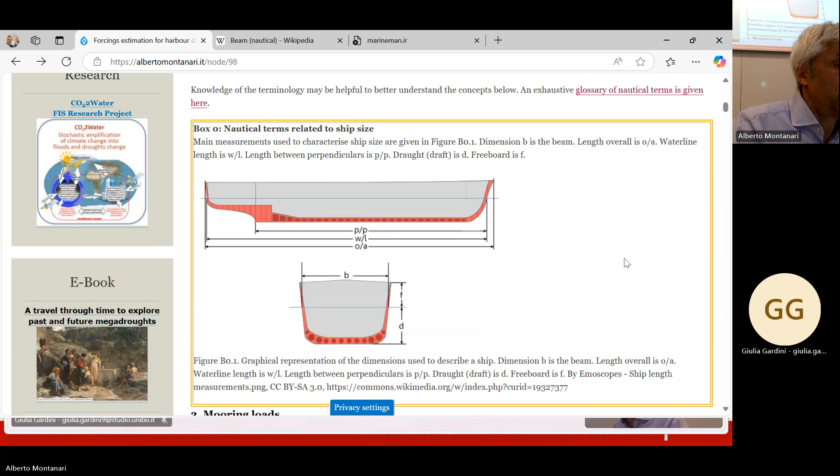Now let's go back to our figure here, I can take it from the PowerPoint presentations. Here there are some terms I would like you to try to remember, because we will use them several times. So the beam is one, and also the length overall of the vessel, marked OA, which means the max length of the vessel.

This is extremely important because, depending on the max length of the vessel you are expecting, you also have to size the berth, as we said, by sizing a longer berth than the max size of the vessel you are expecting. The waterline length is what is called here WL, W for waterline and L for length.

And then there is what is called the length between perpendiculars, which is PP. We will not use it, and it is defined in the way you see sketched here. It is rarely used. Usually, we use the length overall and the waterline length to characterize the longitudinal dimension of the ship. Longitudinal means along the ship, and transversal direction is across the ship.

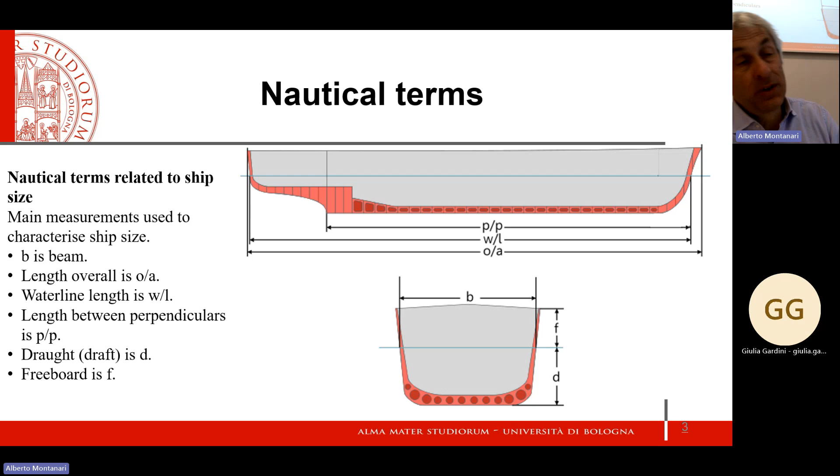And of course, they know, based on engineering design, when it is the time to load some ballast. Okay, this is just a start.

So let's start by talking about the mooring loads, which are loads that come from the sea. You may remember that we discussed last time a sketch, the loads coming from the sea, coming from the land. Mooring loads come from the sea, and they are originated by the mooring lines, which connect the ship to the mooring points.

The mooring loads can be originated by wind hitting against the ship, and this is a relevant force. It's definitely the most relevant, even more relevant than the mooring load originated by waves. When I talk about mooring loads originated by waves, I don't mean the direct action of waves against the berth. I mean the action of waves against the ship that is transferred to the berth through the mooring lines.

And then there are the currents. Same thing: the currents tend to move the ship, and therefore an additional forcing is transmitted to the berth. When we want to estimate these loads, of course, we need to start from a sea variable.

Defining the expected wave height with a given return period. This is a problem that you know how to solve, because with Professor Archetti you already studied how to estimate an expected wave height, wave frequency, wave period for a given return period. So you are already familiar, correct, with the terminology return period and extreme estimation.

Let's start from the ship. For a design ship, an expected ship, up to a tonnage of 20,000 tons, each mooring point can be designed to resist the following minimum loads: horizontal pull ranging from 10 to 100 tons, depending on the ship displacement and type of load. There's a factor of 10 between the minimum and the max of this range. To give you an idea, if you make a simple ratio between 100 and 20,000, you get an idea of the ratio that converts the tonnage of the ship to a horizontal mooring load.

The vertical pull is about 0.5, half of the horizontal pull, and we assume that they may act at the same time, because when you have wind you also have waves, and the waves cause the ship to move up and down while the wind is a horizontal load. Therefore we cannot assume they are not occurring at the same time; they are very likely to occur simultaneously.

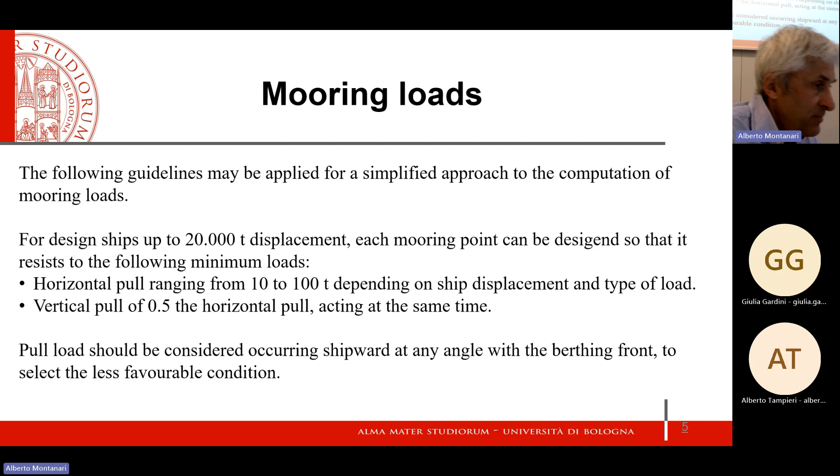Now, for a design ship of more than 20,000 tons displacement, the assessment of mooring loads should be carried out by considering all possible forcings operating at the same time. This means the possible forcings given by wind, currents, and waves. If you have a ship with a very large tonnage, we have to assume these loads can be concurrent, because even if they have different time scales—the current varying differently than the wind and the waves—the time scale of the wind is in a way related to the time scale of the waves, but for the current the time scale is different.

But even if the time scale is different, very large with the ships, we assume that they may occur at the same time. Here you see a reference where I found these recommendations, these orders of magnitude. I think the orders of magnitude are extremely important.

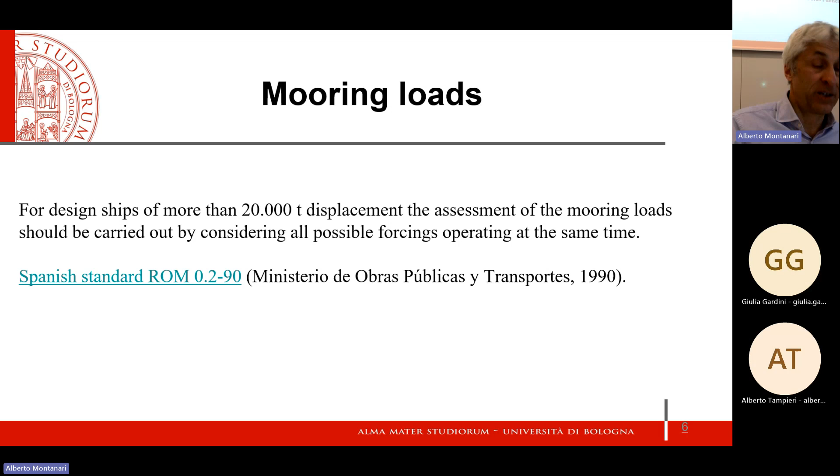But it's important that you know the numbers of harbour engineering, of course - all forces. So we have to characterize wind, we have to start from wind. And how to characterize the wind? Of course, through measurements, and we will see there are precise rules, standards for measuring wind velocity.

Wind velocity is not constant usually. You don't get a constant wind, you get a wind velocity that is varying. There are gusts - the gusts are the strongest episodes of wind velocity. And then, even within a windstorm, you may have some seconds, even some minutes, where you don't have any wind or the wind velocity is very low. As I said, we need to characterize it statistically.

So we start from the data, we start from the observations that are collected by following precise rules. First of all, the instrument to measure wind is the anemometer, and the anemometer is placed at an assigned height over the ground, which usually by standard is 10 meters. And it should be specified - so when you collect wind data, in the metadata, which means additional information regarding the data, you should find the height of the anemometer.

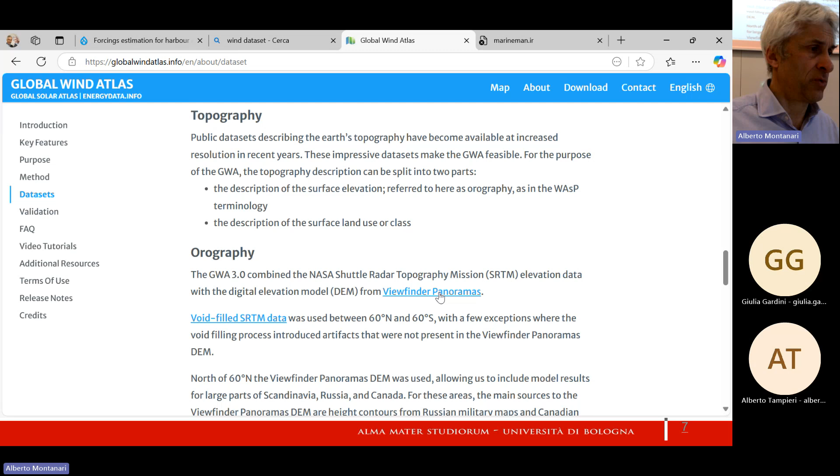Some of them can be used. Also here, there should be a map somewhere. Bathymetry - you see that there is also some data on bathymetry. Anyway, viewfinder panoramas - this is a global data set of digital elevation model which describes the shape of the land.

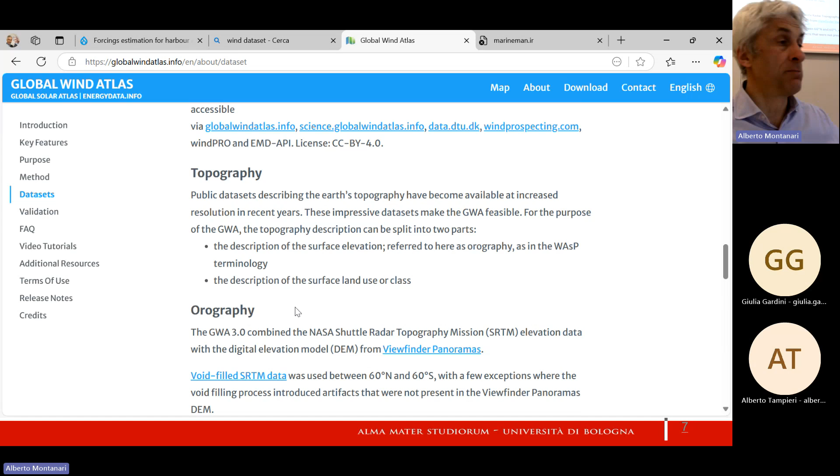And I think it is here, global atlas of siting parameters. Anyway, just wanted you to know that there are several sites where you can find this data, and there are also several videos on how to use it.

And the list of open data wind turbine data set - this is in GitHub, so it's fully open. This is the new European Wind Atlas.

Let's see if this is more accessible, more immediately accessible. Here there is a map - welcome, okay, I am an educator, good. So here you see a map which is clickable, and then you can see what are the variables that are available, horizontal wind, and here you see a terminology.

This gives me the opportunity to clarify the difference between climate and weather. Weather is the day-to-day or hour-to-hour data. Climate is averaged over a time window assumed to be at least 30 years usually. So climate wind velocity over 30 years is useful for designing, for instance, wind turbines - it's not very useful for designing wind forcing against ships.

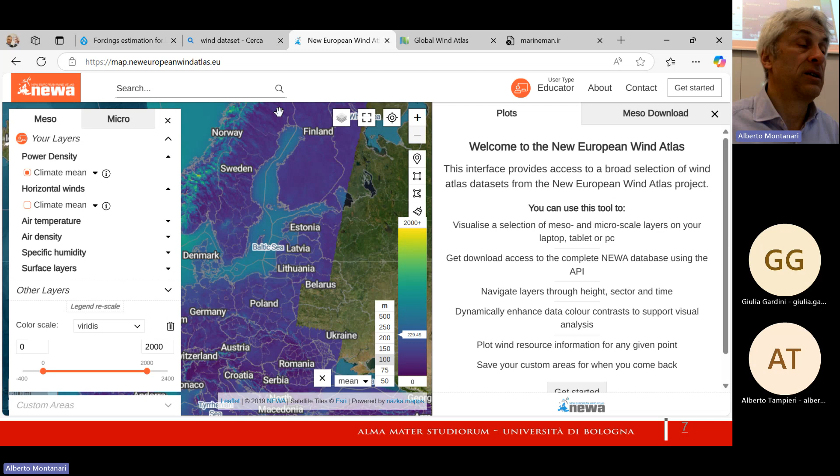When you download this data, try to understand by looking at the metadata how the data were collected. When you use data, you have to get a good knowledge of what you are dealing with - what was the instrument, the height of the instrument, the anemometer, what is the expected uncertainty, what is the time scale of measurement - hourly, minute, or seconds. You really have to get a good knowledge of the starting point of the data and know everything that is possible with it, because it conditions the uncertainty of your final result.

So once you have the data, you have to elaborate it statistically. You have to describe the probability of getting, at the site of interest, a given wind velocity and a given wind direction, because it's not only a matter of velocity - it is also a matter of consideration, the direction of the wind.

Keep in mind that we try to align the berth with the dominant current direction, and if it exists, a dominant wind direction. The wind is less dangerous if it hits the ship in the longitudinal direction, because the transverse area of the ship is much lower than the longitudinal area. If the wind hits perpendicular to the longitudinal direction, it hits a very large area of the ship, and therefore the pull against the berth is much larger. So the wind direction is extremely important.

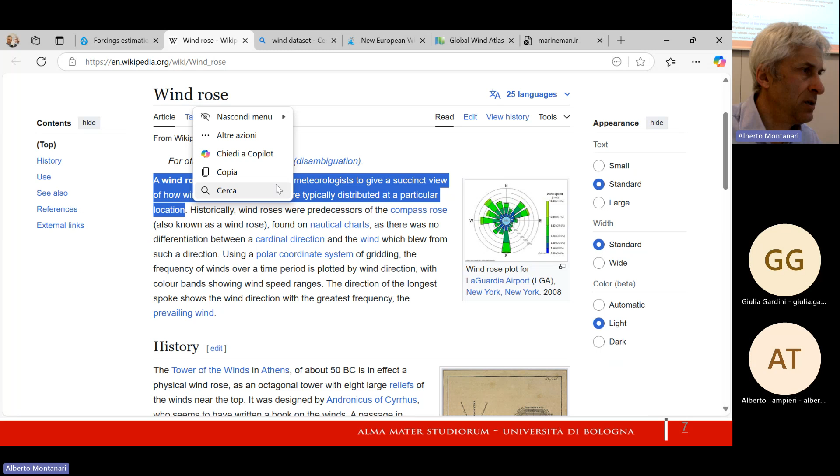So what is a wind rose? Let's open it - wind rose here cannot be opened, so let me go to my website. Here, the wind rose - first of all there are figures here, but let's look at the wind rose. A wind rose is a diagram used by meteorologists to give a succinct view of how wind speed and direction are typically distributed at a particular location. Here there is a figure that I copied onto my website.

Let's get it in PowerPoint because it's the same figure. Here it is - it is a wind rose at LaGuardia Airport. Of course, wind is also extremely important in airports for obvious reasons. What is a wind rose? It is a statistical representation in terms of probability of wind speed and wind direction.

Here you see, first of all, the circle at the center, 3.6%. It is the percentage of time of calm weather, no wind. So it means that over a long period of observations, you get 3.6% of these observations with zero wind. Perfect, this is fine. Now let's look at the south direction - you see that there is a long bar that is shifting in different colors.

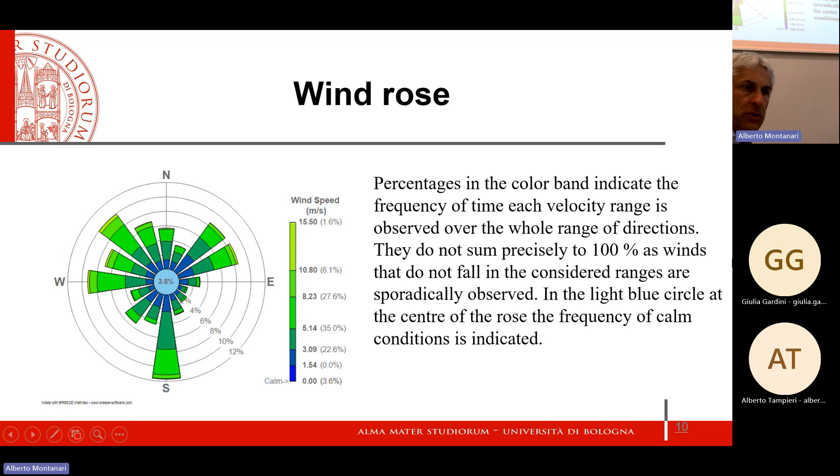But in any case, let's start from this windrose—the windrose gives us the wind velocity. Okay, we already commented about this figure, and also about this.

This is interesting—let's suppose I want to concentrate on the southern direction, and then you can get these percentages. So the wind velocity of 3 meters per second, for instance, is not exceeded about 2 plus 3.6% of the time, where 3.6% refers to the calm condition. So I get the light blue in the south direction—you see that the bar reaches a bit beyond 2%, so it's 2% plus 3.6%, which is the percentage of non-exceedance of wind velocity of about 3 meters per second.

And then if I want to get the percentage of non-exceedance of 11 meters per second, it's about 11.8 plus 3.6% of the time.

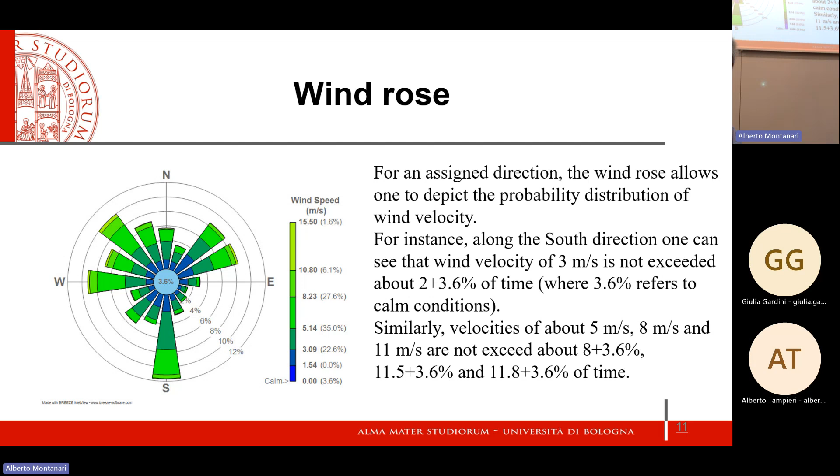So it is very easy to compute the percentages of not exceedance. And if I want, I can make a graph. You see, this is a graph made by myself using the wind rose, where I computed the percentage of not exceedance over all the directions. Sorry, this is not correct.

It's on the south direction. Sorry, and I noticed that after 3 years of using this figure, only now I noticed that the caption on the vertical axis is not correct. This is in the south direction. So in the south direction, I have a graph that gives me the percentage of not exceedance of the wind velocity.

You may remember from previous courses that this is also called the cumulative probability distribution. So the cumulative probability distribution is like the cumulative frequency distribution, because as I said, let's treat them as synonyms. The cumulative probability distribution is the usual probability distribution that we use, for instance, to characterize wave height, and it can also be used in characterizing wind velocity. I think Professor Archetti may have told you that wind velocity is usually...

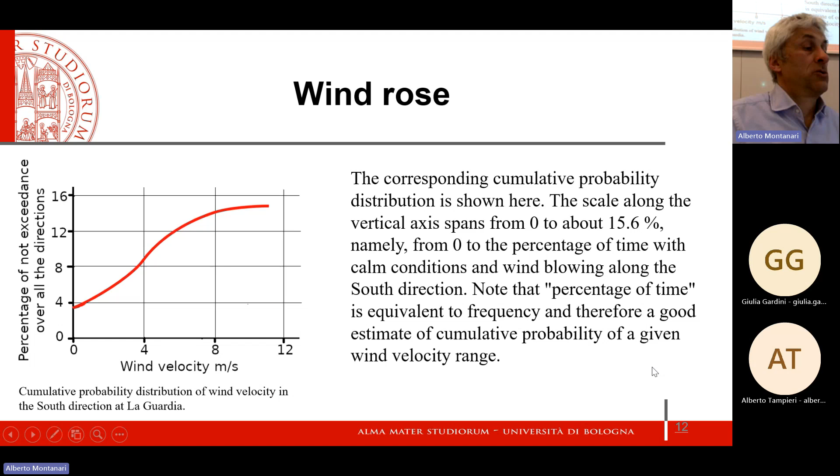So from the data, this is what I need and what I get. Okay, so now let me just do this. Just want to.

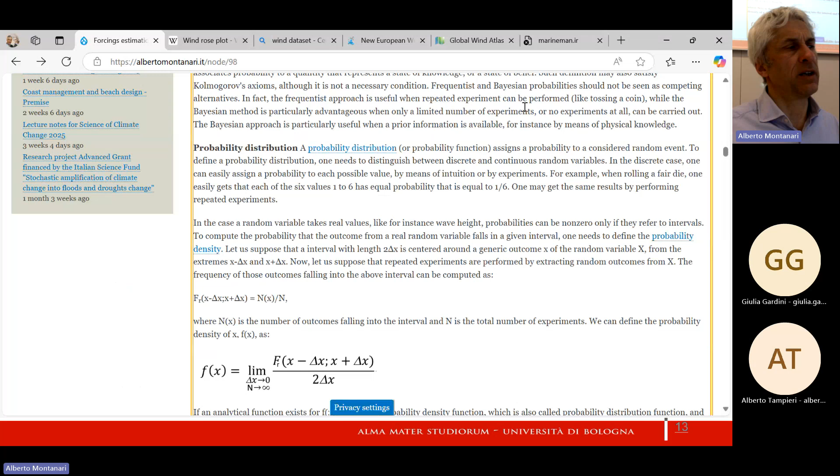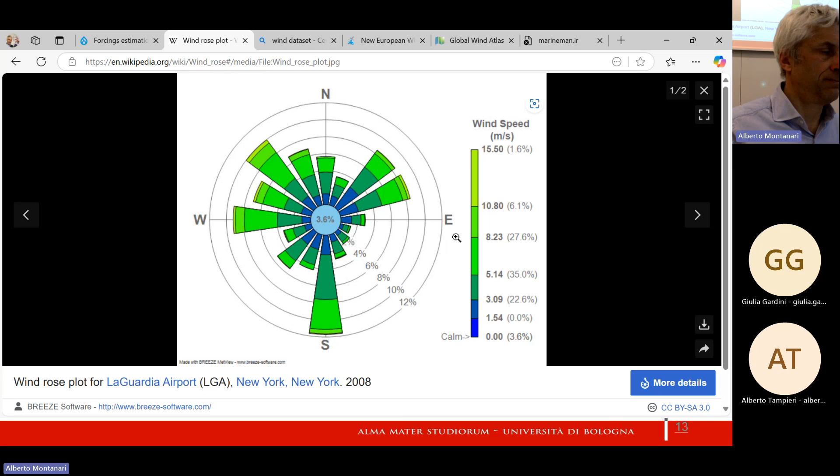Okay, now let's skip this box on probability because I don't want to treat probability now, just later on. Okay, now I want to remain on the very practical consideration. Okay, okay, now, a second.

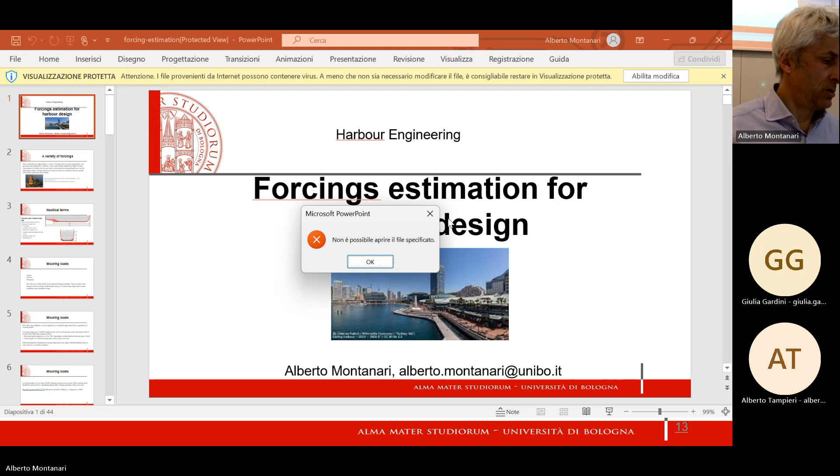Okay, good. Let's skip this. And now let's talk again about terminology. This is more relaxing.

You see velocity on the horizontal axis and names of the winds according to what? According to what is called the Beaufort wind force scale. So what does it mean?

Hurricane usually implies, we talk about a hurricane when the velocity of the wind is around 35 meters per second. 35 meters per second means something like 130 kilometers per hour.

So you know that with a wind of 130 kilometers per hour, you cannot walk. Usually already at 80 kilometers per hour, it's not easy. You can walk at 80 kilometers per hour, but you must be very careful with the gusts. With a hurricane, I mean it's more than 120, actually it's 130. It means that you cannot walk.

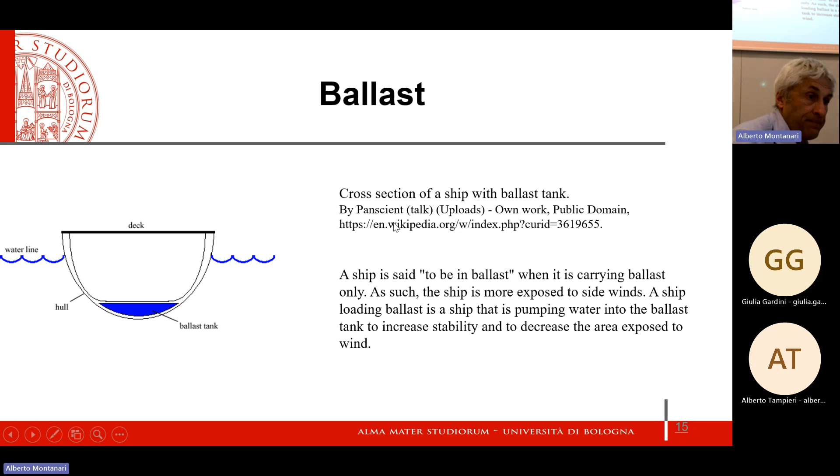Now, as I said, we need to start from the wind velocity, which we estimate with wind roses. We should consider the max velocity of the gust that will affect the considered ship. So max velocity of the gust means the max of the max velocity.

We have to verify that the time resolution of our anemometer allows us to get the gust wind velocity. This means the measurement should have a resolution of at least 30 seconds. We define the gust as the max velocity computed over a 30-second time window. If the anemometer resolution is one measure every 5 minutes, it cannot get the 30-second gust velocity, which is the recommended time resolution. If the resolution is 10 seconds, it is easy to get the 30-second gust velocity by averaging over 3 time windows. But if the resolution is longer than 30 seconds, we cannot get the 30-second gust wind velocity.

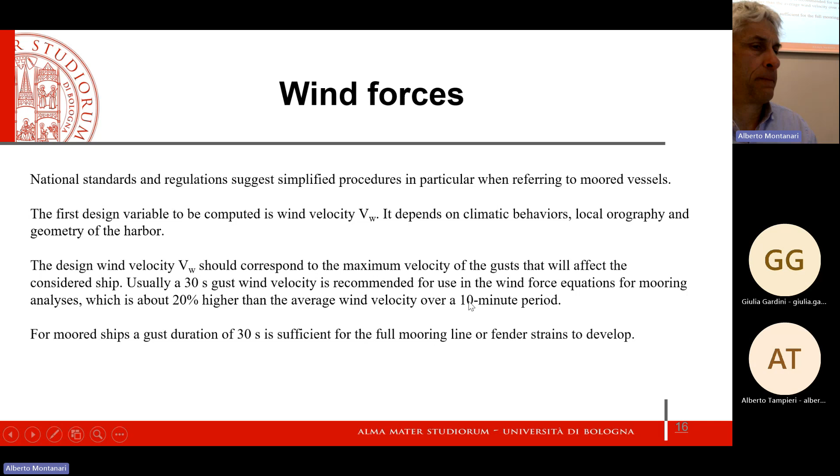Okay, let's take one short break for another consideration about terminology. We talked about bollards. Here are some images, let me refer to bollard port. Here are the bollards, okay, and they are the mooring point. You see some pictures of the bollards over the field.

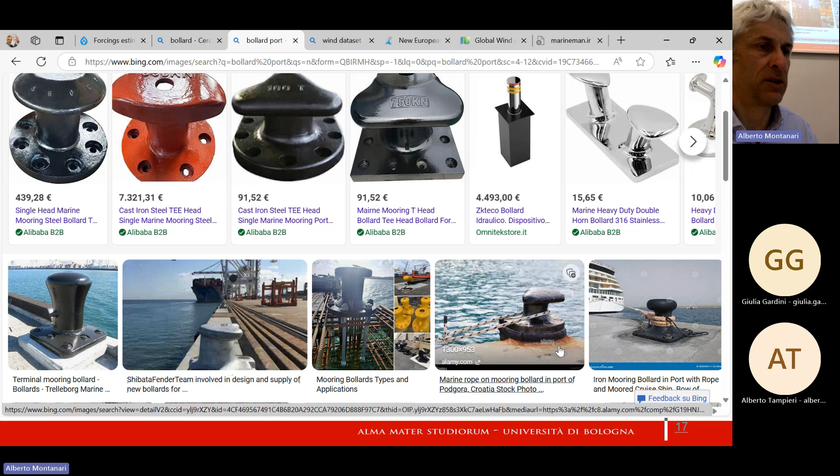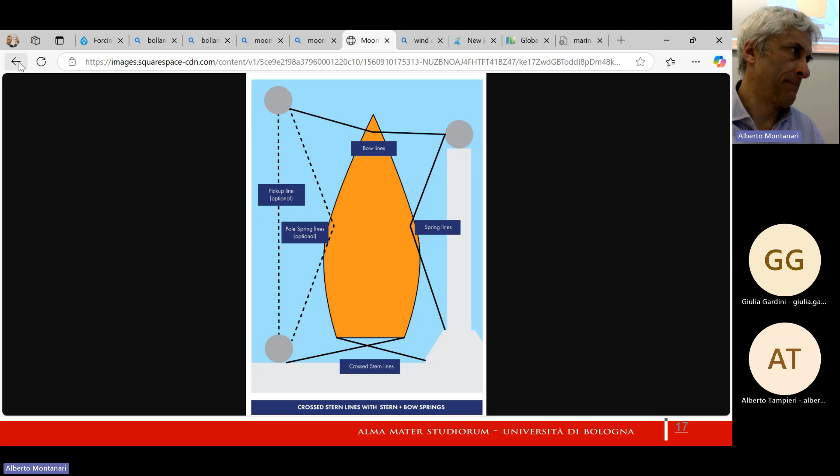But we'll discuss the terminology later on. And then there is another thing that I want to... okay, I don't remember, but I'll come back later.

Okay, so wind forces, some recommendations when calculating mooring forces without closer investigation: the Spanish standard, which is available for download on my website, recommends to adopt a minimum wind velocity of 22 meters per second with a gust factor of 1.2.

What does it mean, the gust factor? It means that 22 has to be multiplied by 1.2. It's a safety factor. Okay?

Same rules suggest to adopt a minimum wind velocity of 17 meters per second for mooring operations in normal conditions. Okay? And other international standards give different suggestions.

Why, first of all, a consideration: what is the difference between normal conditions and extreme conditions? Of course, normal conditions means what is happening every day, what we experience every day. While exceptional conditions means an extreme situation. Usually when we have an extreme situation, we have different procedures and different traffic conditions.

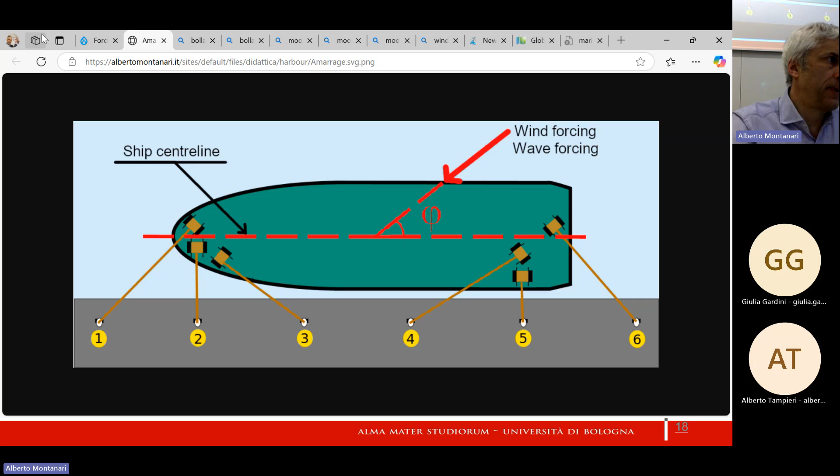Now, AW is the side area, and if I multiply the side area by the squared sine of phi, I get the component in the transversal direction, the component against the side area. So if phi is 0, meaning the wind is aligned with the longitudinal direction, squared sine of 0 is 0.

So if the wind is aligned with the longitudinal direction, the component on the transversal area is 0. And then I have to make the corresponding computation to compute the forcing in the transversal area. BW is the front area of the ship, always over the waterline, remember, and I have to multiply it by cosine squared of phi.

Now, this is the computation of the exposed area. Between the round parentheses, I have the computation of the exposed area to wind from the two components, longitudinal and transversal area. Now I have to multiply it by the density of air, or let's say the specific gravity. The value, in kilonewtons per cubic meter, is about 0.01.

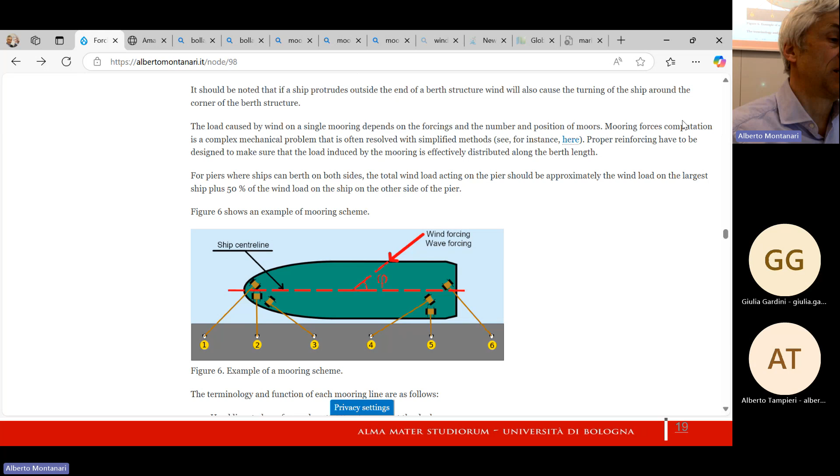This figure is also interesting because it gives another example of terminology for the mooring lines. The headline is what I called before the bow line, okay? And let's make reference to this figure, the bow line. Anyway, the headline keeps the forward part of the ship against the dock. So you need lines aligned at an angle, because if you used only perpendicular lines, you wouldn't prevent the ship from moving back and forth.

On the other hand, you also need the perpendicular lines, like number 2 and number 5, because in case the wind is straight against the longitudinal area, phi would be 90 degrees, and the perpendicular lines take most of the forcing. They are most effective against forcing perpendicular to the berth. Headline and forward breast line keep it close to pier, and number 5 is the aft breast line. Then there are the spring lines, the forward spring and aft spring, number 3 and number 4, which together with the headline prevent the ship from moving back and forth.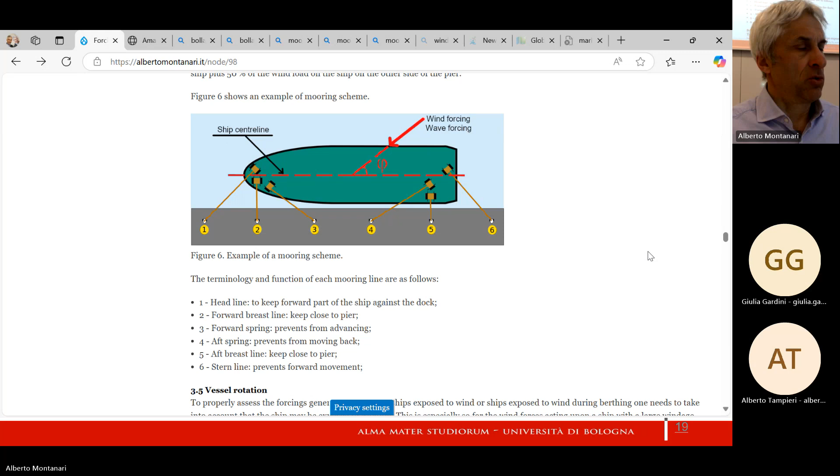So this terminology, again, I will not ask at the exam. It's not really something for the exam, but keep in mind that it's essential information for your communication, okay? Now let me go back to the PowerPoint presentation, which is easier.

Now, how to compute AW and BW in absence of known values? If the ship is important, you usually have this information from the technical description of the ship, something you find in the ship documentation. But for ships that are less important, you may not have time for this information, and therefore there are some empirical relationships which allow you to calculate the transverse area and the longitudinal area depending on more easily available ship parameters, in particular the beam and the length between perpendiculars.

It's quite clear that the longitudinal area must depend in some way on the ship length. So AW is expressed as the product of the length between perpendiculars - this is the only case where we use this measure of the ship, usually we use length overall for sizing the berth - multiplied by the sum of G plus Z. G is the ship draught.

I'm sorry, there's a link that's misspelled, let me check if it's also wrong on the website. Let me see. Okay, here it is, okay no, here it's okay. Ah yes, there is a link to fix. I need to remember that I need to change this one too. Okay, let's go back here.

So once again, G is the draught - sorry, G is the freeboard, which is the ship depth minus the draft. And Z is the mean height of the longitudinal area. So they take the length, a measure of the freeboard, and a measure of the height of the longitudinal area, and from these they derive an estimate of the transverse area and the longitudinal area. BW, the transverse area, is computed in the same way, depending on the beam of the ship, the freeboard, and Y, which is the mean height of the transverse area.

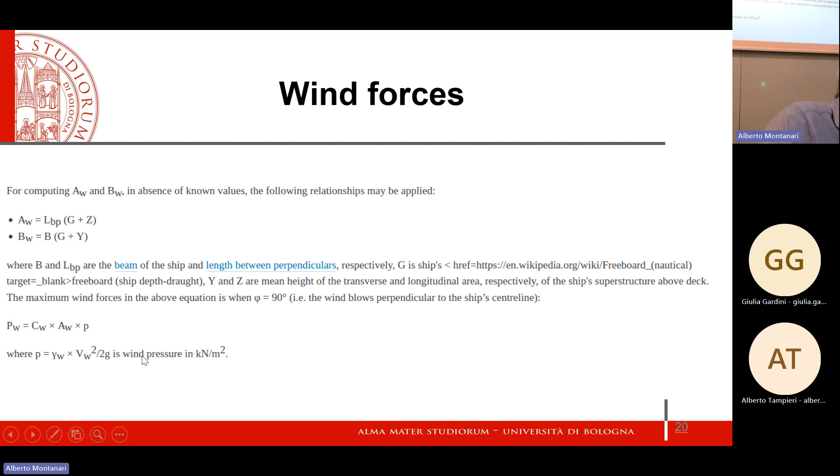So this is just a simplification. And this is the abacus that I mentioned to you, a reminiscence of old times. In old times, in engineering, we used a lot of abacuses because they allowed a quick computation when automatic computation was not available.

Here you can see that depending on wind pressure and wind velocity, the abacus also reports on the right the definition of wind velocity in terms of our wind classification, the Beaufort wind classification. You get two curves, and the upper curve gives the pressure computed as squared velocity divided by 1600.

Why 1600? If you make a quick computation on the previous relationship in order to derive directly the pressure, since we are talking here of pressure, depending on the wind velocity, you take all the other coefficients together, the product ratio of all the other coefficients, by assuming the given value for the air density and by assuming g equal to 9.81 meters divided by squared seconds, basically you get 1600.

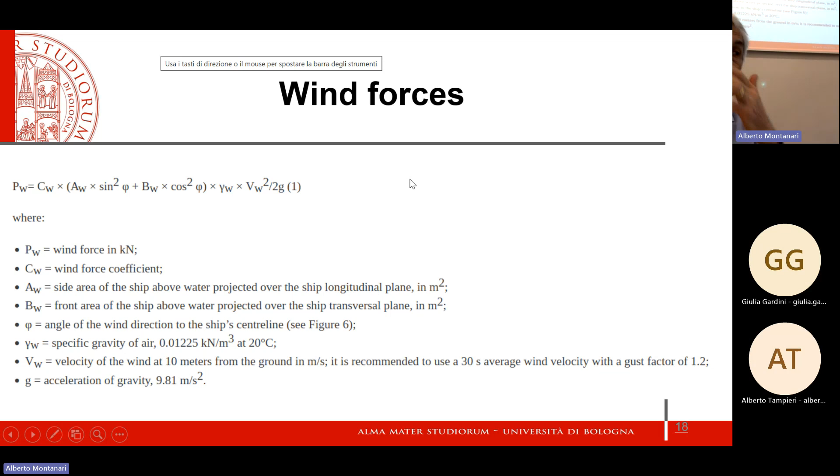Keeping in consideration that graphical computation, in some cases, is still useful from an engineering point of view, because it gives you a graphical perception of the results, which is more significant in terms of communication compared to a relationship. So if you want to present to a stakeholder a relationship like this one, it is less effective in convincing the stakeholders that you used a good solution, that you are presenting something trustable.

The analytical relationship is less effective with respect to a graph. The graph is more convincing. This is our experience, and this is why we sometimes use, in dialogue with stakeholders, object-oriented programming. Instead of showing code like R code, we use a block diagram, object-oriented programming, where we show here there is the berth, here there is the sea, and here there is a graph of the wind forcing.

It looks like you are more informed. In some interactions with people, when the stakeholders are very diverse, using too much math or too much mathematics may give the feeling that you are trying to hide complexity, something that you don't want to see. With the graph, complexity is better rendered.

Of course, comparing the analytical relationship and the graph, the graph is more effective. Also for interaction, for a quick decision, a graphical representation is much easier sometimes. You get an immediate computation, while going over a PC or a computing machine and making the computation sometimes takes longer.

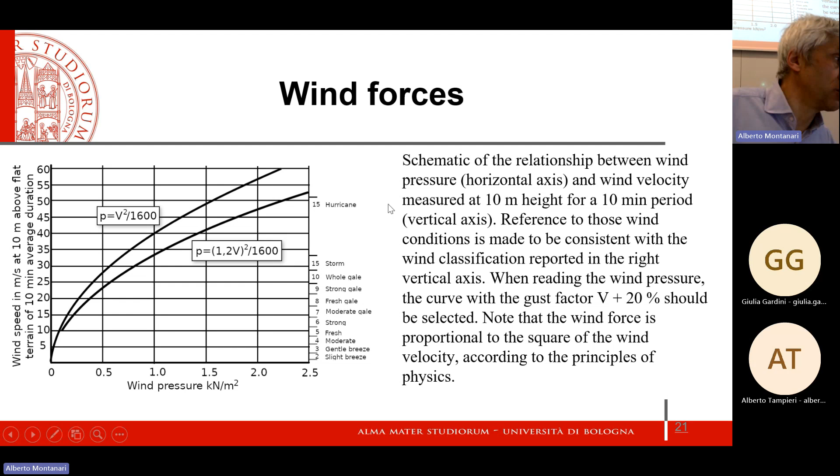These mooring lines are elastic, they are not static, for obvious reasons, because with the dynamic constitution they can absorb better the gusts of wind. But this means that the computation of the mooring forces has to take into account the dynamic behavior of the mooring lines. So it is not easy to make this computation. We will make an example with an exercise, but it's interesting, it's not an immediate computation. And you understand that the mooring point is to be sized with a strong, rigorous approach, something that really needs to be very strong.

Now, if the wind blows at an angle, which is the usual situation, there will be a transverse and a longitudinal load component plus a rotational moment. This is what we talk about now. So if the wind is at an angle, or even if the wind is perpendicular, you may get a rotational moment, and we will see why.

So what is the distributed load given by the relationship you see on the screen, caused by wind along direction X, where X is the direction of the berth, along the berth structure. So you have to compute, first of all, the component along the berth of the wind forcing, indicated here as PWX.

You check. Yeah, okay, we are there.

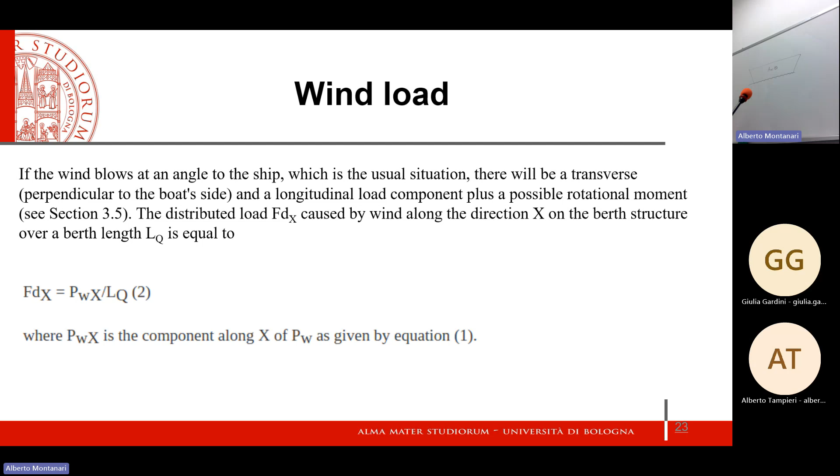But this doesn't mean that the boat, if unmoored, would simply move along the wind direction. Because if I look at the ship from the top...

So you may expect something like this is the center of gravity. Here, I expect that the ship just moves here.

Actually, any ship, depending on the geometry of the ship, if it is hit by wind, it tends to rotate around a point, which is an inherent behavior of the shape.

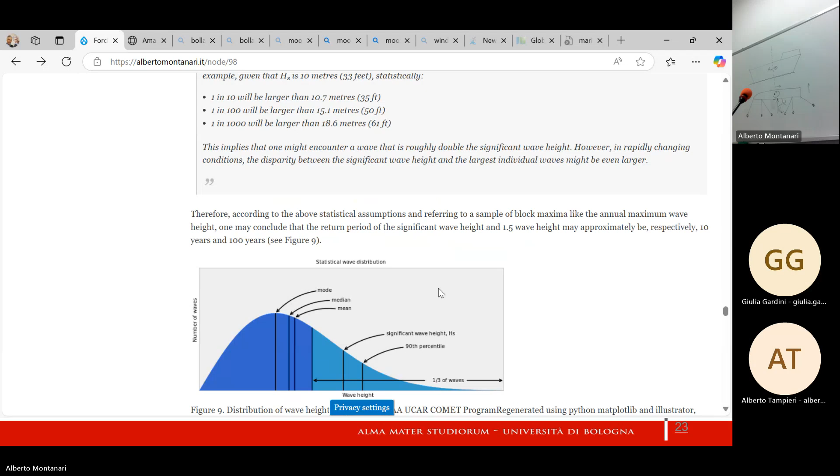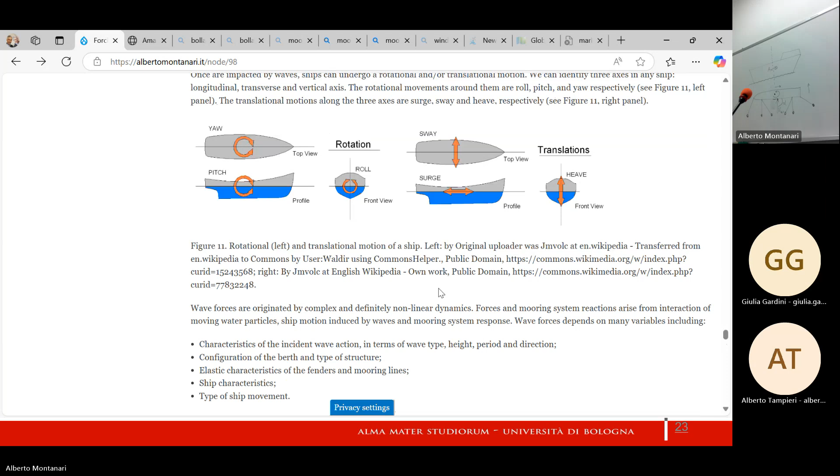Okay, I think I anticipated too much because this is indeed important when you compute the forcing along the mooring lines, which is a bit later. Before that, it's better if I follow the workflow, if I follow the thread of the web page. So let's postpone this.

How to compute the position of the pivot point, how to compute the rotational moment. The rotational moment, of course, is clear how to compute because there is a distance like eccentricity between the... also there is this distance here, here on the page, but let me just postpone this because it's not urgent.

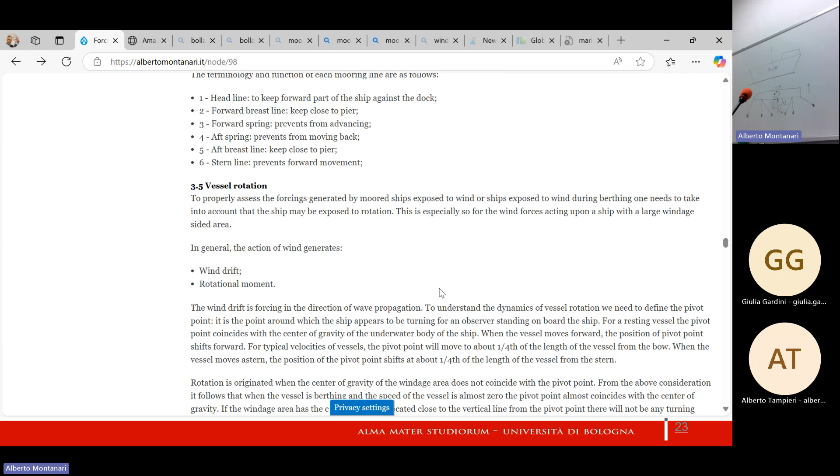For now, let's move forward, restarting from the computation of the distributed load. This is clear - once I have the component of the wind forcing along the direction of the berth, I can compute the distributed load. Okay.

Now, I think that this is something that we already discussed. Okay, this is interesting. For piers where the third statement...

For piers where ships can berth on both sides, which may happen: the total wind load acting on the pier should be approximately the wind load on the largest ship plus 50% of the wind load on the ship on the other side of the pier.

So basically, clearly, if you have a pier with ships along both sides, so this is the pier, okay, and you have a ship here, and a ship here, okay.

So the suggestion is they move the largest ship here, or if you have more than one ship, get the total load, and here on the other side you get only 50%. Why? Because clearly, if you get wind in one direction from the other side of the pier, you get less wind, because it's already screened by the first ship, okay?

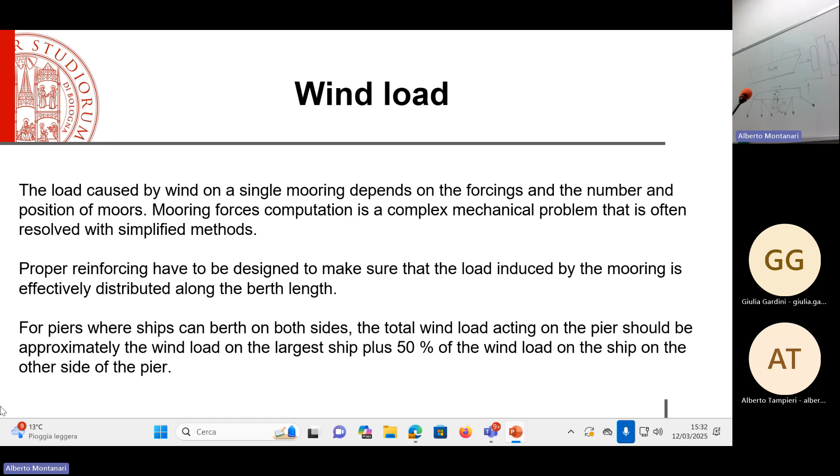So it would be too much to take the full load on both sides. These indications are all derived from my references, the Port Designer's Handbook and the Spanish one. Once again, these are guidelines that you have to check, depending on the location where you are making your design project and depending on the international regulations or local regulation or local laws in force. So check them, of course.

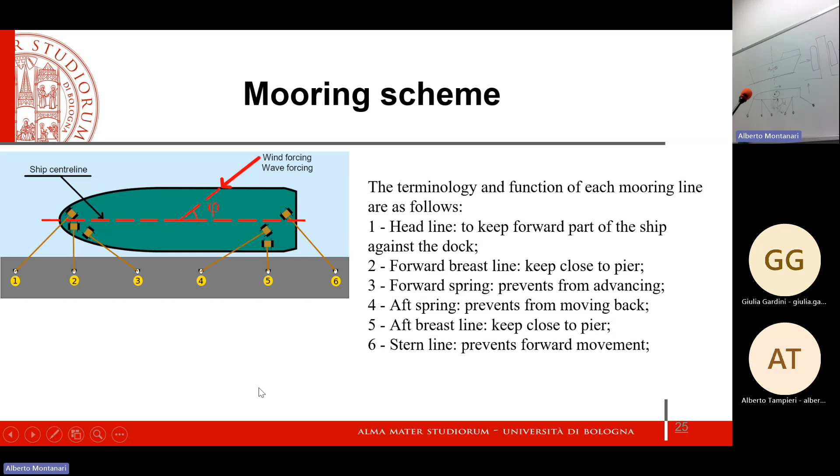Okay, we already discussed the terminology of the mooring lines, so I think we can skip this. And in general, I think we can also skip this because I talked about wind drift and rotational moment. Drift means the resulting force of the wind. It is the resultant, the sum of the forcing along the wind direction, and there is a rotational moment. So the wind drift is forcing in the direction of wave propagation.

Okay, that's fine. So now it's time to understand the dynamic of vessel rotation. So we need to define the pivot point. The pivot point, let me define it: it is the point around which the ship appears to be turning for an observer standing on board of the ship. Okay, so if I am on board,

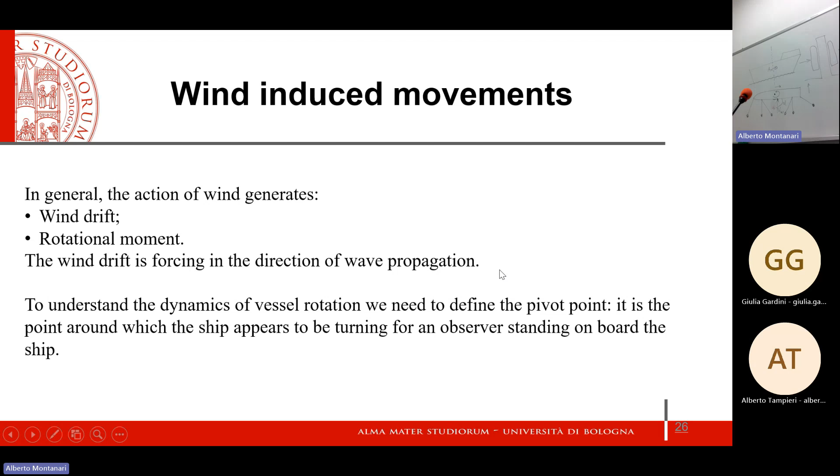I get a feeling that when I am on the pivot point, I am rotating around myself without any movement, okay? So I am just rotating around an axis and I'm not depicting in my rotation a circle. Okay, so it is defined based on the feeling of an observer standing on board of the ship.

Now, this is the interesting consideration. For a resting vessel, velocity 0, the pivot point is located in the center of gravity of the underwater body of the ship. Why the underwater body? Because the ship rotates by generating a pressure on the water around it. And therefore, it's clear that the rotation axis of the ship must be located in a way

that the pressure against the water is uniform. And therefore you have to refer to the part of the body of the ship that generates pressure over water. So it is the underwater part of the ship. So you get this underwater part, you get the center of gravity, it is a volume, it is an underwater volume. You get the center of gravity of it, and this is the location of the pivot point. And the rotational axis is the vertical axis passing through the pivot point.

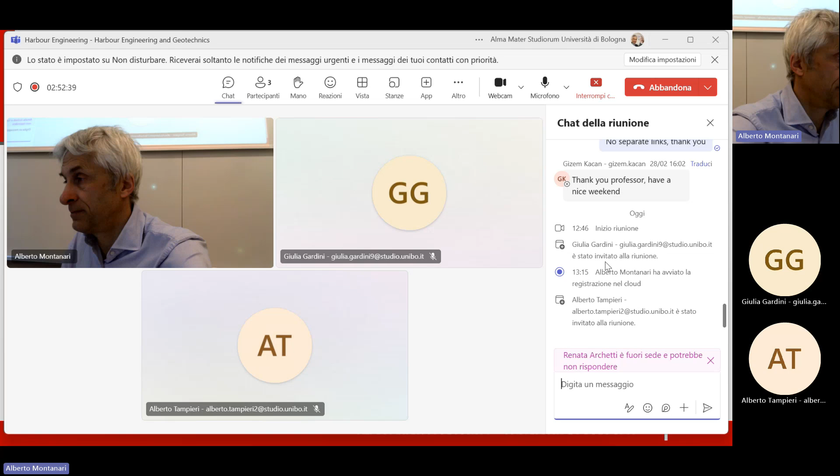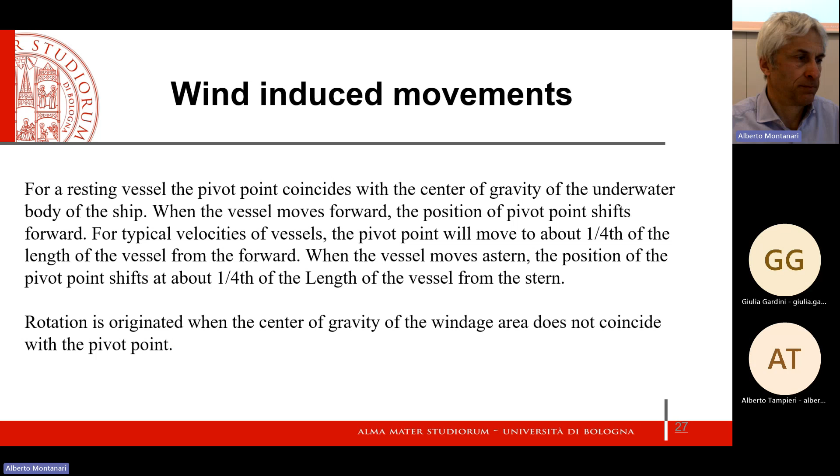So we have a similar approach with a similar empirical relationship. We don't go into much detail. Keep in mind that it is quite frequent that I ask how to compute wind forcing at the exam. I usually don't ask anything related to wave forcing and current forcing. You will understand why, because there is a larger portion of empiricity in the computation.

Okay, so first of all, we need data on waves, and we know that. Here there are some considerations on the minimum length of the observation period. Let me make some considerations on this.

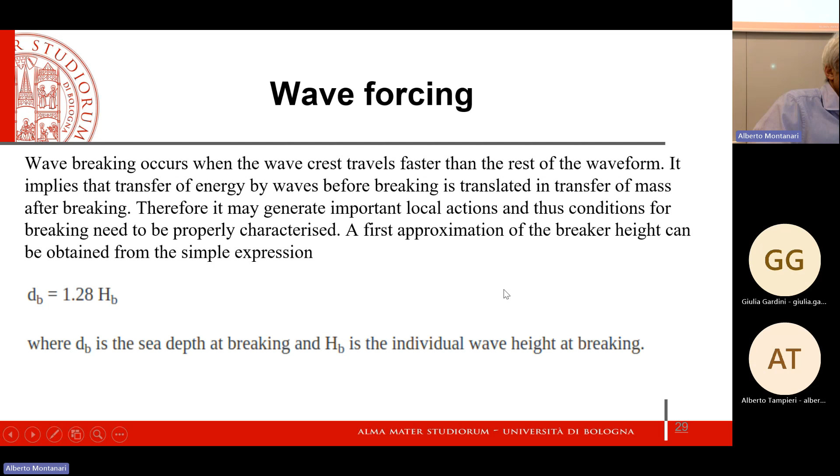Now, another important consideration: when there is the need to compute wave forcing, we don't take as extreme wave height the usual design wave for a given return period. We get a more reduced value. And why? Because usually the wave forcing is a lower order of magnitude with respect to wind forcing, and therefore usually the berths are already designed for a wind forcing that is higher than the wave forcing.

Of course, they may occur contemporarily, but on the other hand, it's also true that it is reasonable that when computing the concurrency factor, when you take into account the concurrency of the two forcings, it is reasonable that we are suggested to reduce one of the two, and it is reasonable that we reduce the lower one.

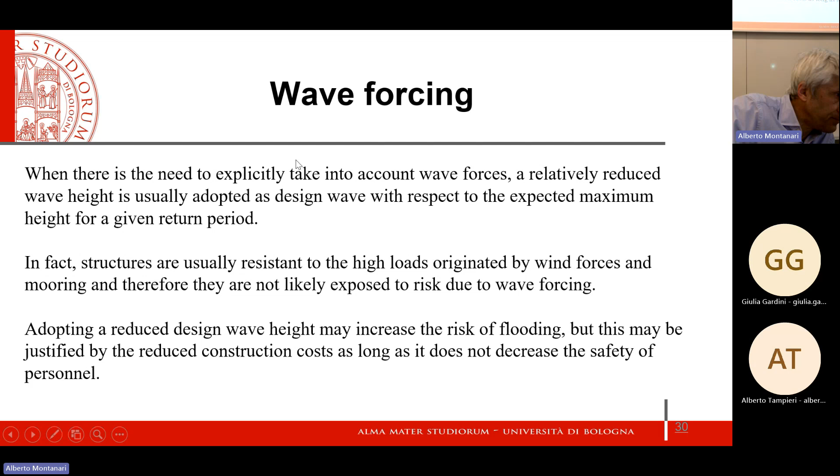Now, of course, we know the behavior of waves in a port and what factors affect this behavior. So the bathymetry, we already talked about it.

Reflection of waves we will talk about explicitly, along with possible resonance. When waves get reflected by a wall, we get a reverse wave traveling towards the ocean, and we have to make sure the two waves don't superimpose, because if they superimpose, they can generate harbour oscillations, which are extremely dangerous and can break any mooring lines. If you get resonance on harbour basins, it means the reflected wave is superimposed with the incoming wave, and then they can break any mooring line.

There is no way out if you get resonance, because the wave height is progressively increasing. Therefore we have to take this process into account and be very careful. We will dedicate a lecture to it, which is not easy, because studying resonance is really not easy. These are processes that are extremely complicated.

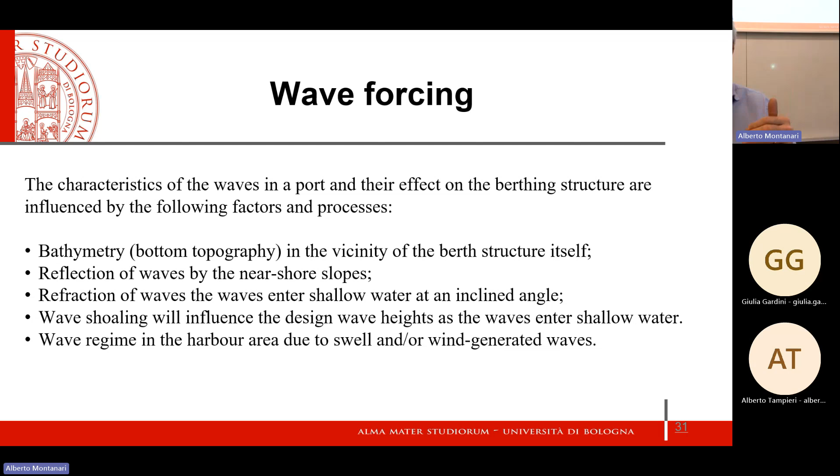And also in the harbors, we have to take into account this possibility that we get wave resonance. We also have to take into account reflection and wave shoaling, which means that the wave height is progressively increasing when the waves get closer to the sea bottom. So at the end of the story, design wave is estimated for a given return period, which is defined as follows.

The design return period should be determined by considering the consequences given by a given design wave. And when human life is at risk, the return period is never lower than 100 years.

Let me spend a few more words about the return period, because I want to make a consideration which I think is interesting. Return period is related to probability, to frequency, since we skipped talking about probability. So let's talk about frequency. If we have a long series of data, this is fine. Return period is the average time between two events that have an intensity equal or higher than a given one.

But there is an interesting question related to return period. If the return period is 100 years for a given design, what is the probability or frequency of getting that event in 100 years, which is not one? Let's suppose you size a project against an event with a return period of 100 years. Then, in 100 years, what is the probability of getting that event?

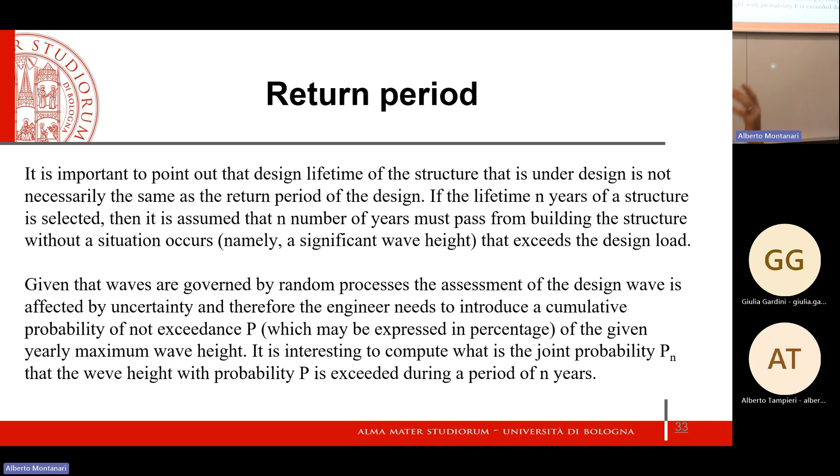So the probability of this hypothetical event occurring in a time span as long as the return period is interesting. First of all, let's refer to the annual max wave height, since we are talking about frequency. So our data set is the annual max wave height. First, let us recall the relationship between probability of non-exceedance and return period.

P is equal to T minus 1 divided by T. So if the return period is 100 years, then the probability of getting this event is 99%.

Not exceedance, sorry, the probability of not exceedance. Let me state it again to be clear: if the return period is 100 years, the probability of not getting that event in a given year is 99%. So the probability of getting it is 1%.

But for a period of n years, lowercase n, what is the joint probability of not getting the event? Look at the second relationship: if the probability of getting it follows this reasoning, it's squared, like this.

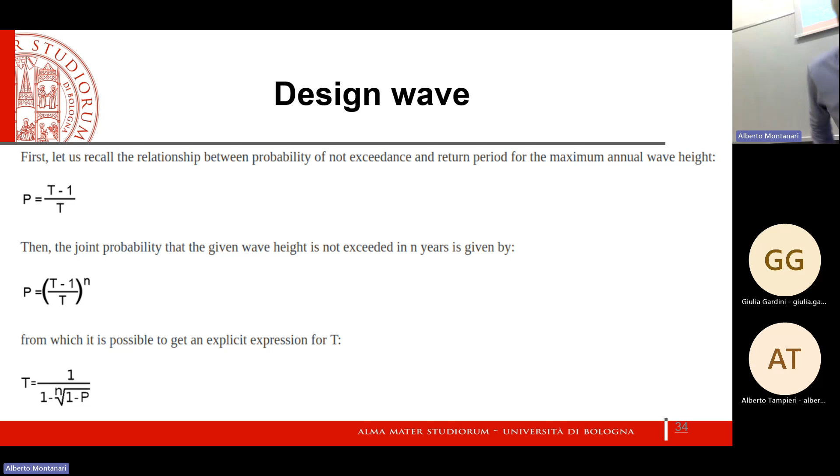Now, in 2 years, what is the probability of getting it? It's again T minus 1 divided by T, to the power of 2. What is the probability for n years? It equals T minus 1 divided by T, to the power of n, which I think gives a probability of 63%.

You can get the explicit relationship for T, but let me show the graph. This is the lifetime of the structure, and this is the return period. So take a return period of 100 on the vertical axis, and go to a lifetime of the structure of 100 - you see that it is marked by a probability of 63%. This marks the equivalence between the lifetime of the structure, n, and the return period. During a time span equivalent to the return period, there's a 63% probability of getting the event.

So here's an interesting consideration: if we want to reduce the probability of occurrence during the lifetime of the structure to 10% of the event, with the return period equivalent to the lifetime - if the design lifetime is 50 years, we should design for a return period of about 500 years, if we want to reduce the probability to 10% in those 50 years.

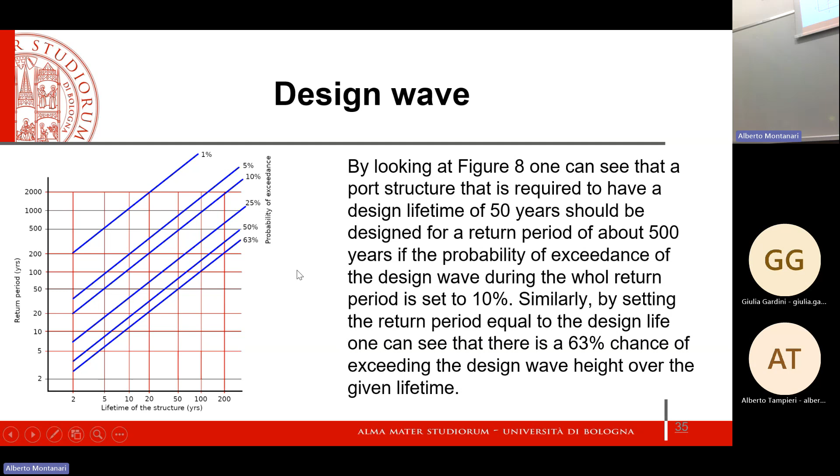If people are at risk, we need to increase the return period because otherwise it's too much. If people are at risk, and the expected lifetime is typically 50 years - since a bridge is designed for no more than 50 years - a 63% probability of risk to people in 50 years is too much. This is why we design bridges for a return period of 200 years. It's an interesting game with probability, you see.

It's no longer used, it's decommissioned - meaning if there is still a reservoir, it's emptied and we don't use the dam anymore. But very often, after 100 years, the reservoir is completely filled by sediments. Still, we design the dam for a return period of 1,000 years.

If the design of a berth implies a disaster, if there is a collapse, then the return period should be really large. The problem is that when you want to estimate a design variable, a forcing for a return period of 1,000 years, you need a much longer observational record, otherwise it's not reliable. This is why when we design dams, given that we don't have long records for rivers, about 50 years, and with waves even less than that, besides adopting a very high return period, we also use a safety factor.

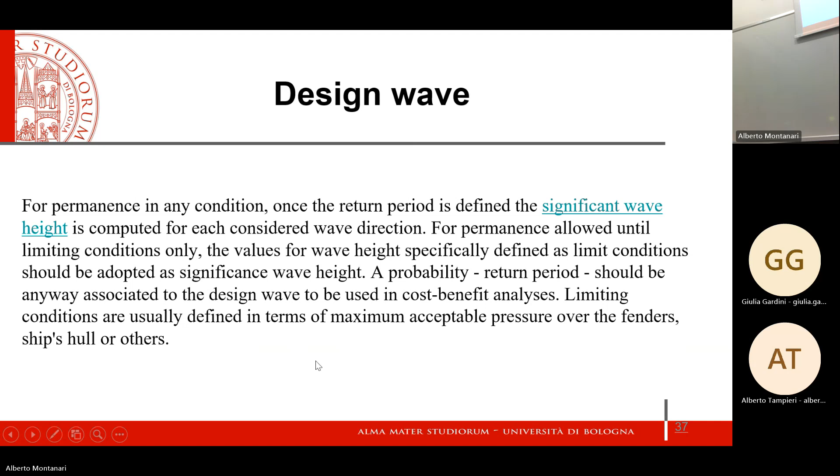Now, some rules of thumb, again taken from the Spanish standard. If we have ships with displacement up to 3,000 tons, the significant wave height that we take as a project variable should be of the order of 0.4 meters for pleasure craft, 0.6 for fishing vessels, and 1 meter for fishing vessels with a length overall higher than 30 meters.

For a harbor, 1 meter of wave is significant because the harbor is a sheltered area. Keep in mind that observations should be taken inside the harbor. If you have observational waves in the open sea, we expect that inside the harbor they are softened, smoothed, and therefore 1 meter into the harbor is really a lot.

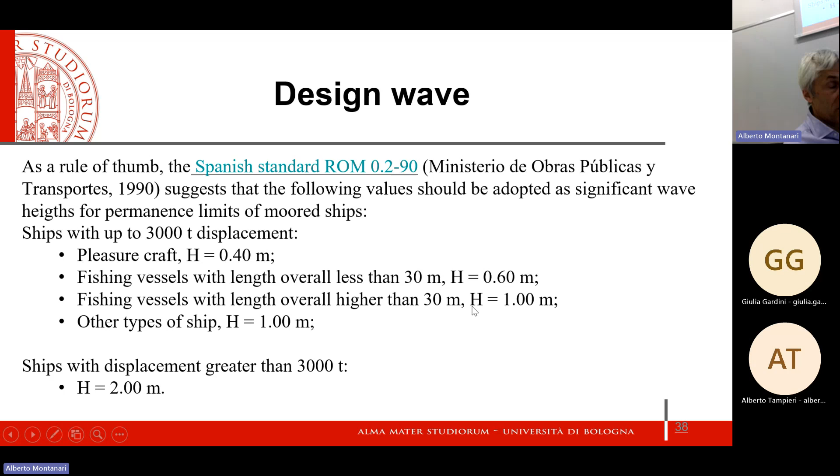This rule of thumb is increased to 2 meters for ships with a displacement greater than 3,000 tons, because the relationship I will present for computing wave forcing depends on wave height in the same way wind forcing depends on wind velocity. We get a relationship with the squared wave height as an estimate of the energy of the impact of waves against the ship, so it's important to adopt the right wave height.

Now, wave forces are originated by the movement of the ship caused by wave action, and the ship is a rigid body with 6 degrees of freedom. I will show you this figure with more detail. The motion of a ship at sea has the 6 degrees of freedom of a rigid body, corresponding to translation along 3 directions and rotation around these 3 directions.

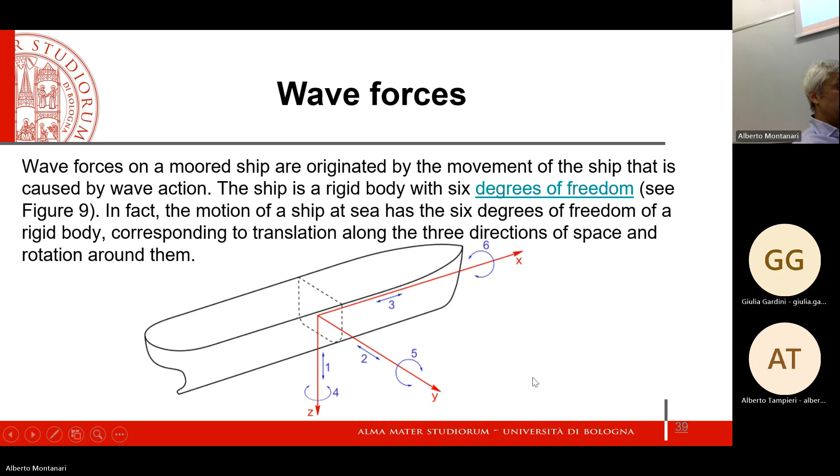Let's focus on terminology. Once impacted by waves, we can have rotational and translational motion. We identify 3 axes: the longitudinal axis, the transverse axis, and the vertical axis. The rotational movements around them are roll for the longitudinal axis, pitch for the transversal axis, and yaw for the vertical axis. The pitch is the rotation around the transversal axis, the roll is the rotation around the longitudinal axis, and the yaw is the rotation around the vertical axis. The translational motions are heave, sway, and surge, respectively. Here you see the figure with all these notations.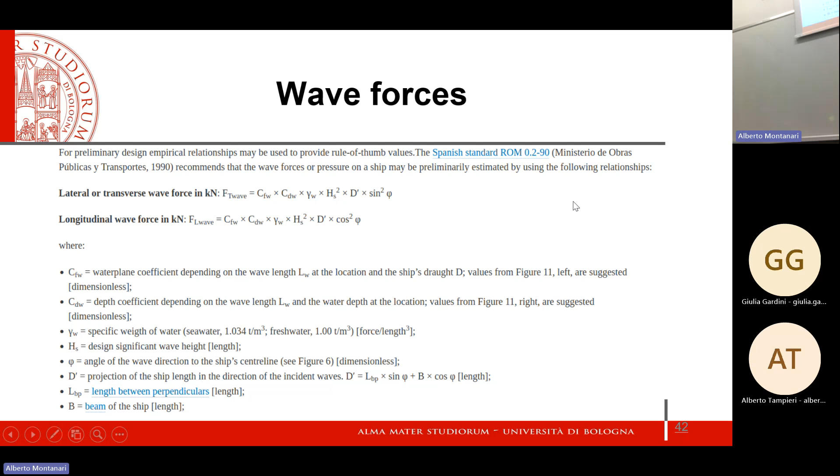And here is the relationship. Let me check if I can get it from the website, because I can make it larger.

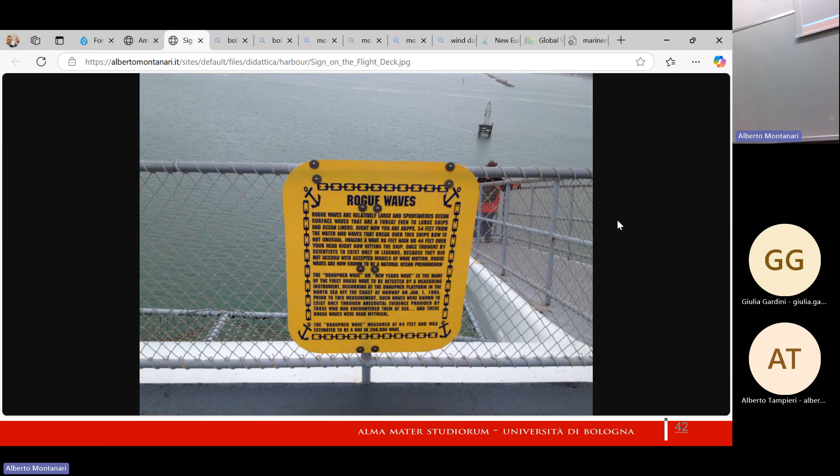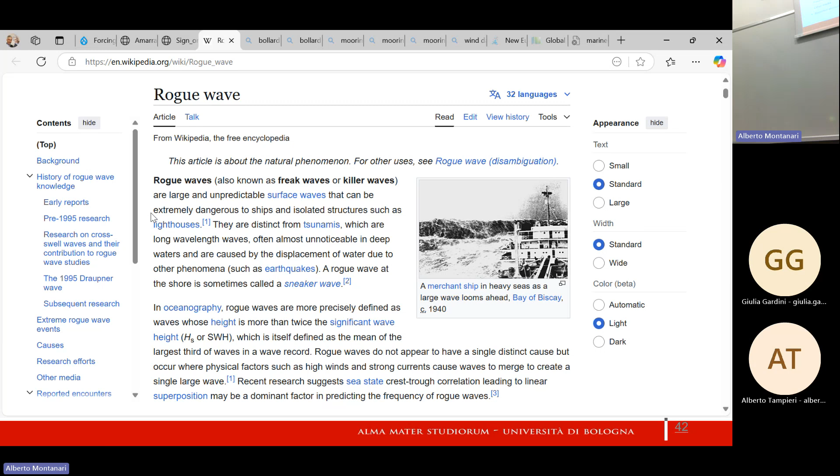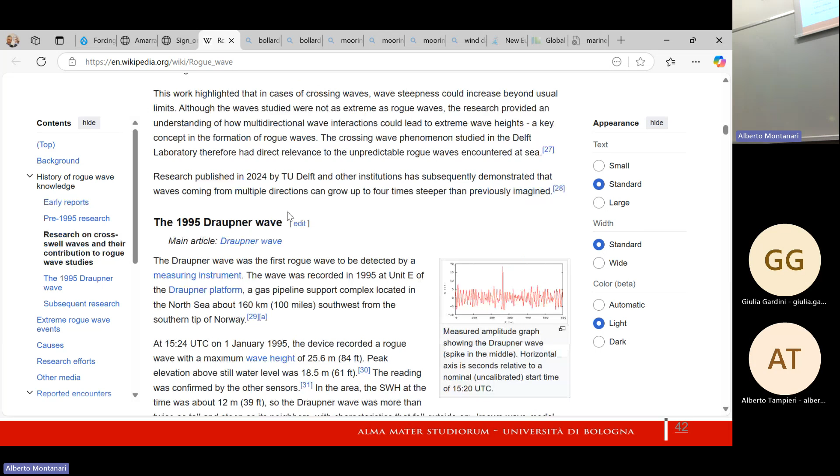It is interesting to look at the Wikipedia page of it, which is here. You see a picture here, and freak waves or killer waves are large and unpredictable surface waves that can be extremely dangerous to ships and isolated structures such as lighthouses. They are distinct from tsunamis. I think there are also some pictures somewhere. These were only recently discovered.

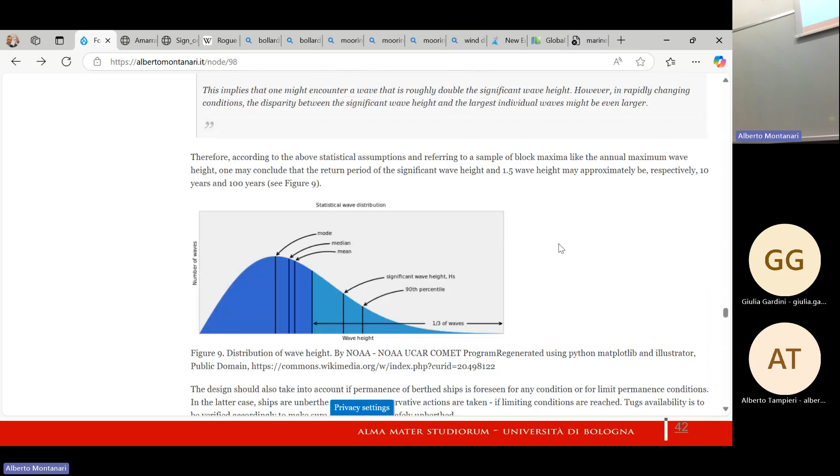Okay, so let's... too many windows open, just one second. Okay, here we are. Let's get the relationship. We have about 10 minutes to go. Here it is. Okay, good, let's see, very good.

I forgot to mention, when I talked about wind forcing, I forgot to give a value for the wind coefficient. I think it is about 1.2, but you can find the value in the web pages.

So, lateral or transverse wave force and longitudinal wave force. There is a coefficient, here it's called CFW, the water plane coefficient, depending on the wavelength LW at the location and the ship's draft D. There is a figure given later, an abacus, from which you can get the value of this coefficient. There is another coefficient, CDW, a depth coefficient, which depends on the wavelength and the water depth at the location. Again, there is another abacus to give this coefficient. It is expected to increase when the wavelength is comparable to the water depth.

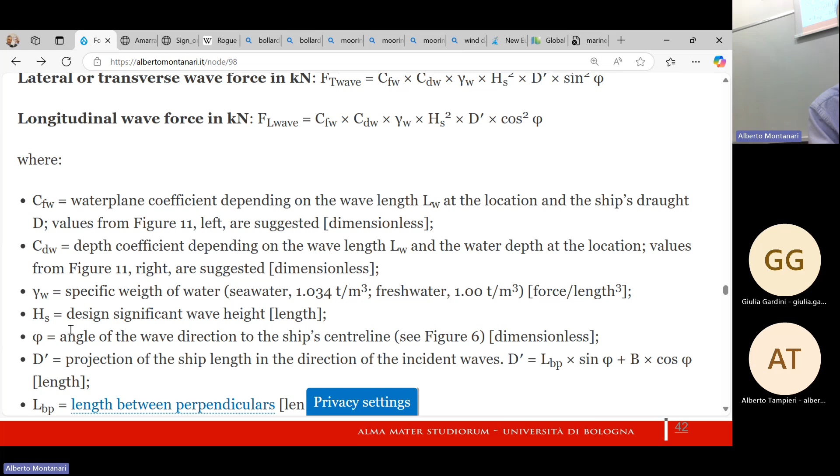HS is the design significant wave height, which is squared. Once again, you have an estimate of energy - you may remember that the energy transported by a wave is proportional to the square of the wave height times the density of water. And phi is the angle of the wave direction to the ship center line, analogous to the one we considered for the wind forcing, and that's it.

And this is the lateral wave forcing. Here there is this terminology, transverse wave forcing, which I found reported in a guideline, but it is a bit misleading. To be clear, lateral means the wave forcing on the longitudinal side of the ship. And then we have the analogous for the longitudinal wave force, which is against the stern or against the bow.

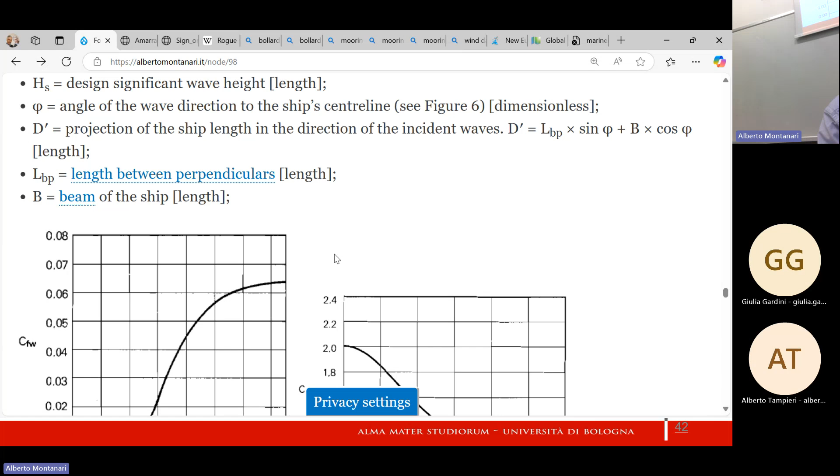And here you have the estimate that depends on the cosine phi, and that's it. And here you have the two abacuses - this is for CFW on the left and CDW on the right.

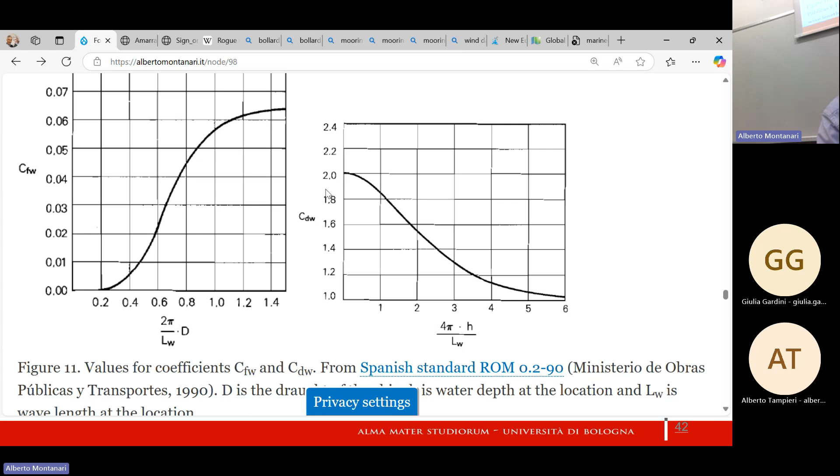This is taken from the Spanish standard. So once again, Lw here is wavelength and Cdw is the coefficient. You see that for H, the depth of water/depth of sea - for increasing wavelength, we get a higher coefficient, and for increasing water depth, we get a lower coefficient. This is the opposite of what I said before, sorry for that, and it is a bit counterintuitive.

Once again, you don't have to learn by memory this relationship because it is less intuitive. And then the relationship that I gave for the wind - this is taken from the same reference - but anyway, you don't need to learn it by memory.

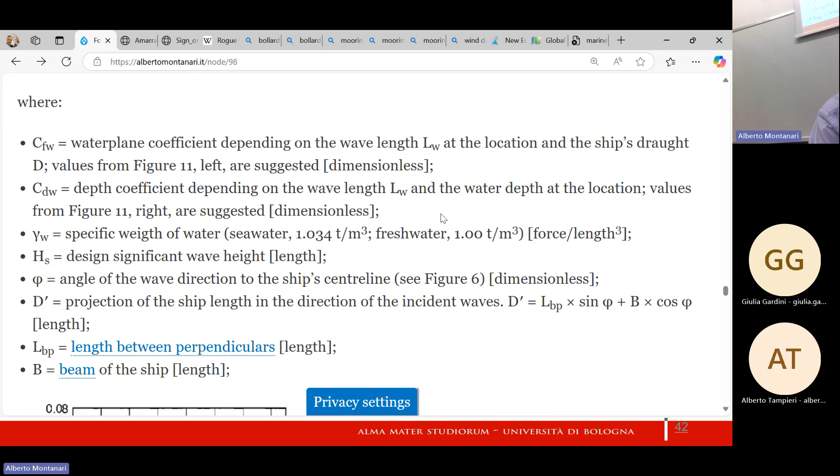I think that it's the case to stop now for today, because resonance we will talk about later. Next time we will make an exercise on the computation of the wind forcing, yes, wind forcing.

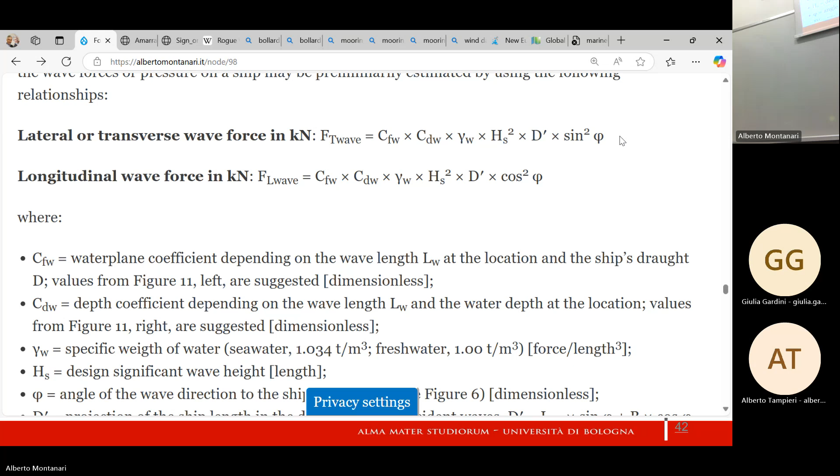Questions? Okay, thank you, let me just start. Sorry? Sorry? Yeah, I remember that.